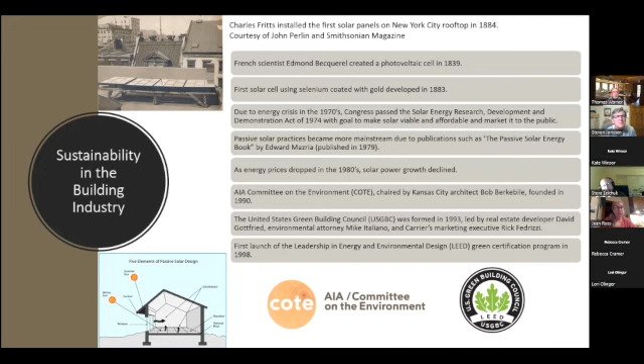And LEED has gone through a number of iterations since 1998. It's now in its fourth version, and they've actually got a version 4 and then a 4.1. The 4.1 version was an enhancement to version 4, which helped establish better criteria for projects to meet certain requirements.

The LEED program is a point-based system, and it's set up in different credit categories. Those categories are integrated process, sustainable sites, location and transportation, water efficiency, energy and atmosphere, materials and resources, and indoor environmental quality. There are some regional priority credits that tie back to the location of the projects. And then there's a category for innovation and design, for projects that are looking to go above and beyond what is normal in sustainability. Those would be the types of credits that would establish that in that area.

As I mentioned, it is a point-based system. It's about 110 points, and it's got 4 different levels. There's a certified level, silver for 50 to 59 points, gold 60 to 79, and then platinum, which is really the top tier, at 80 plus points.

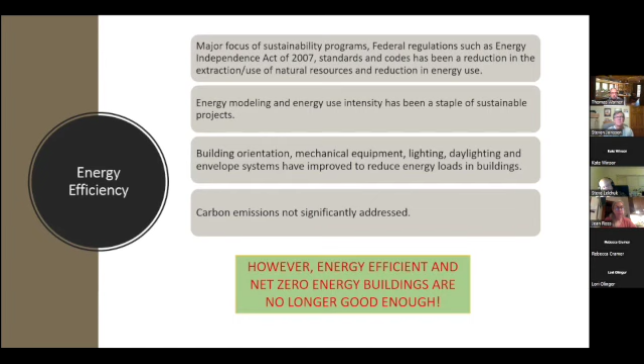So what changed? Well, the climate crisis has really upped the ante a little bit. We've now seen 47 continuous years of increasing global temperatures. Our weather-related events are now becoming more intense. We've got more extreme drought. The wildfires are much greater. We've seen the ferocity of our hurricanes increase due to rising ocean temperatures.

We've seen more 100-year floods than we've ever seen. And when we see the oceans rise, the storm surges are just taking out communities. We've also seen an increase in tornadoes. But a couple of the things that I think are even more significant are the melting of the glaciers and polar ice caps. Those are in turn raising the ocean levels. At this point, they're swallowing low-level islands, but in the future, they might actually affect major communities such as Miami.

One thing I thought I would point out is the photograph in the upper left is from a photo I took in Iceland back in 2017. The sign that's in there is where that glacier was located in 2010. And it had receded by 2017 about 1/4 of a mile, and it continues to recede. So that gives just a sampling of what is happening with our glaciers and polar ice caps.

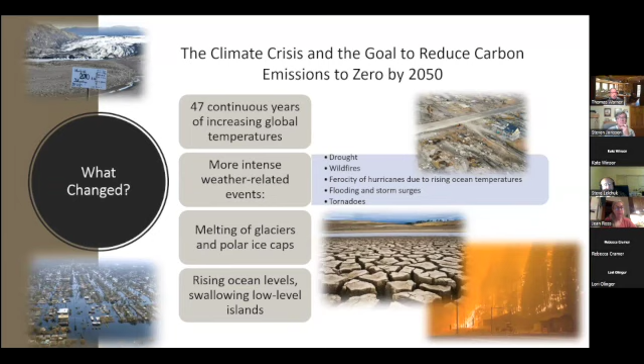Just to reinforce the issue on global warming, this is a 30-second slide presentation of the global temperature anomalies from 1880 to 2021. It's based on a normal temperature cycle from 1951 to 1980. And as you can see up in the upper part of that is the years that we're seeing. And as it gets further towards our current time, you can see how the temperatures have increased significantly.

So when people say that it's always been warm and cold, we've never seen this before. This is so far out of what we've seen in the past as far as temperature anomalies.

Oops. And let me move that forward. All right.

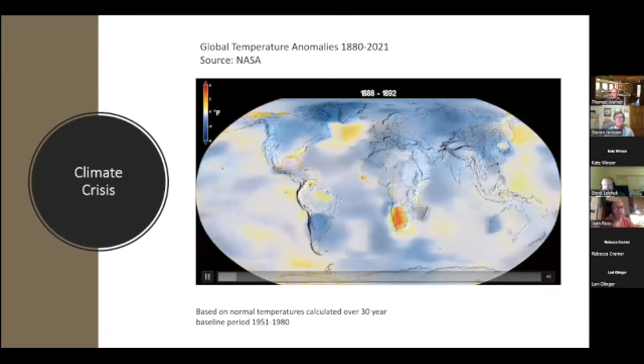And as a result of these increasing temperatures, the United Nations Climate Change Conference of 2015 issued the Paris Agreement, where they set a temperature increase limit of 1.5 degrees Celsius above the pre-industrial levels. And what they're really stating is we need to have rapid and far-reaching improvements to reach net zero greenhouse gas emissions by 2050. That was the goal, is to get net zero by 2050.

And what happens if we exceed that? Well, first of all, down in the graph there, that's showing our current warming rate. And at the rate we're going, we will hit that 1.5 degrees by 2040. So we really need to make significant improvement to avoid that 1.5 degree level. And the right-hand side slide will show what happens if we're hitting that 1.5 degrees.

We're going to see a loss of a lot of species, plant species, insect species, coral reefs. We're going to see a lot of our sea ice disappear in summers, and then we're going to have to deal with a lot more extreme heat conditions as well. And we really don't want to think about what happens if we go beyond 1.5 degrees. When we get to two degrees, it's significantly worse.

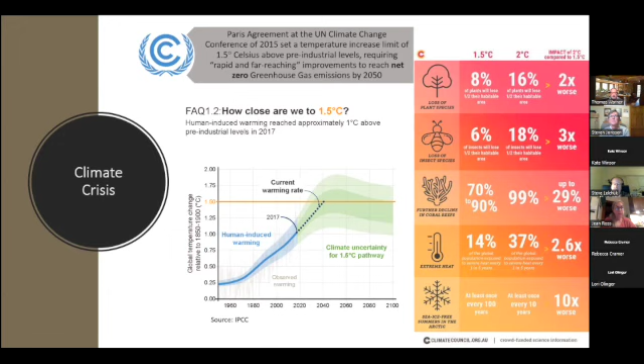One of the other things that's been coming out in the last few years is an increase in the number of corporations that are developing environmental, social, and governance frameworks, and that's including reporting carbon emissions. Corporations are starting to also require that new construction projects achieve net zero carbon.

We're also seeing in the industry, the architect, engineering, and construction firms are now seeing requirements to report our own carbon emissions within our own operations. The Carbon Disclosure Project and EcoVadis are a couple of examples of those carbon reporting frameworks that we would report our own emissions to. Again, it's really the corporations pushing a lot of this now to decrease the carbon emissions on not only their projects, but our side as well.

So how does this all relate to the building industry? Well, the built environment really makes up about 42% of all total global CO2 emissions. About 30% of that is in building operations, and then the remaining percentage of that is from the materials that are put into the building. That's called embodied carbon, and I'll talk about that in just a few minutes here.

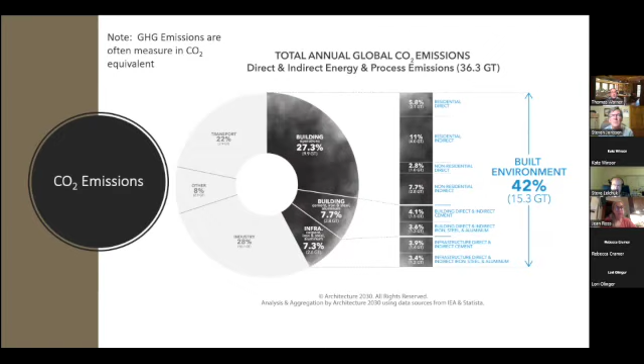So our presentation really concentrates here on decarbonization, and the key principles of building decarbonization include energy efficiency, electrification, grid interactive, and then renewable energy. And grid interactive is basically connecting buildings to the grid through energy management systems. If we've got renewable energy systems, they would be feeding back and forth with the grid. Also things like demand response as well, for peaks and so forth.

We're also looking at ways to reduce the use of fossil fuels, using low carbon fuels. And then again, we talked about in new construction, as part of this decarbonization, we'd also be looking at low embodied carbon.

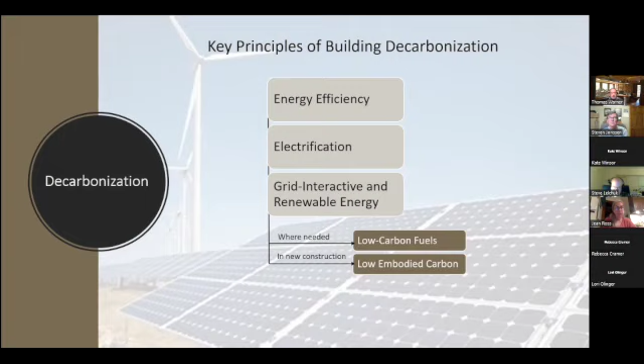So the two types of carbon that we have are operational carbon and embodied carbon. Operational carbon is anything that's related to the energy consumption and operations of the building. Switching on a light will hit operational carbon. If you've got an appliance that you're plugging in, that's going to take operational carbon. Your mechanical systems that are running, that's all operational carbon.

On the other side of it is embodied carbon, and embodied carbon comes from the extraction, manufacture, transportation, and construction, in addition to the end of life of a material. The main difference between operational carbon and embodied carbon is basically a fixed carbon. We typically would have an upfront carbon, and I'll talk about that in a little minute.

But the operational carbon, from a typical building, would be greater than the embodied carbon. But in a high performance building, we're looking at that being significantly less than what we'd be seeing in the embodied carbon, as the embodied carbon is really a fixed quantity in a standard similar type building.

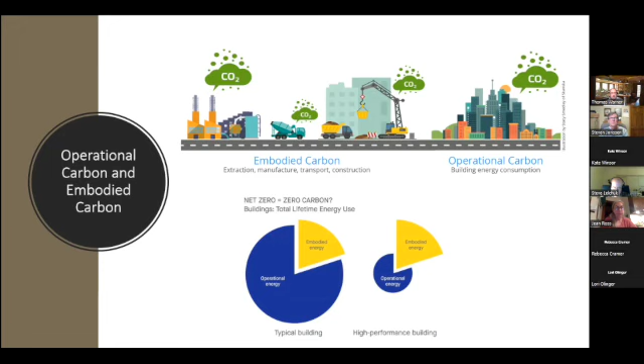So in operational carbon, for decarbonization from the operations side, to meet our goal of zero emissions by 2050, we'd be looking at highly energy efficient buildings, and those would include building envelopes, mechanical systems, LED lighting and commissioning, making sure that all of our systems are operating properly.

Then electrification is another key component of that, and that's no on-site fossil fuels, and that would include things like using electric heat pumps, electric boilers, electric water heaters, and electric appliances. And then additionally, we'd be looking at 100% powered by on and off site renewable energy. That would include building level solar farms, wind power, solar hot water, and there's other solutions there as well.

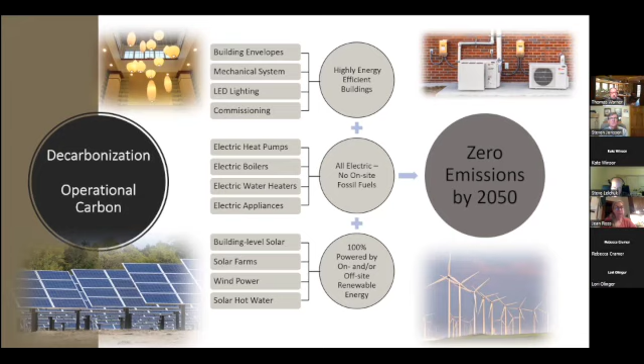So not only do we want to look at it from the building side, but we're looking at it from the grid side. So if we electrify all of our buildings and the grid can't support it, that's not going to work. What we want to make sure is that the grid is also becoming carbon neutral, and the grid actually has become 30% less carbon intensive between 2000 and 2019. We've also seen that 83% of America's new power came from wind and solar in 2021.

There's been at least 18 states, and possibly more since this slide was produced, that contain 45% of Americans and have committed to carbon neutral grids by 2050. And Biden in his Inflation Reduction Act proposed a carbon neutral grid by 2035. So those are goals from the grid side. And if we can get that all to work, that'll go a long way in getting us down to net zero by 2050.

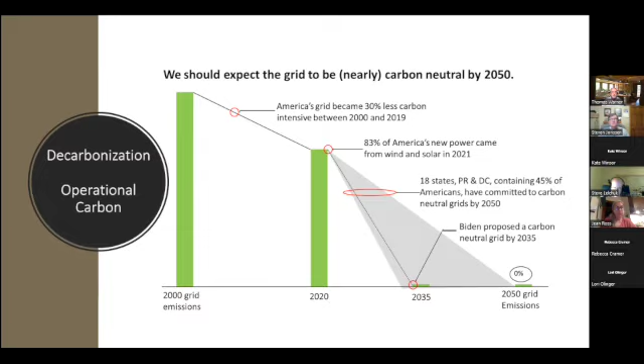So one of the things that has changed is the cost of power for power plants, and solar power has reduced in a little over a decade by over 80% in cost. And onshore wind has also reduced by at least 20%. So now those two are the lowest cost of all the electricity prices for new power plants.

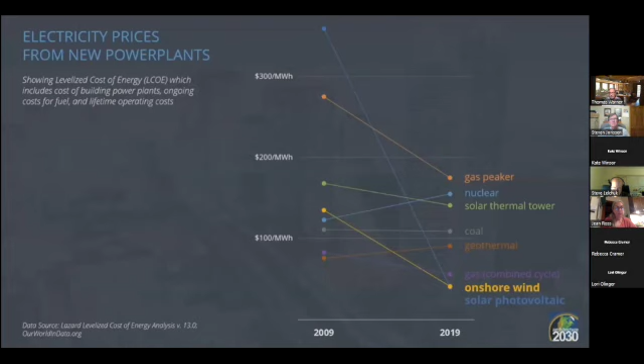And now I'm going to talk a little bit about embodied carbon. Embodied carbon is really the greenhouse gas emissions arising from the manufacture, transportation, installation, maintenance, and disposal of building materials. This slide shows the different stages of embodied carbon, and the numbers down below, the A1s through C4s, are life cycle stages. And I'll talk a little bit more about life cycle in just a minute.

But again, the emissions start generating from the moment that the raw material is extracted from the earth, and it continues through to the end of its life. But like I said, there is upfront carbon, and then if we take it all the way to the end of life, that would be a whole life cycle.

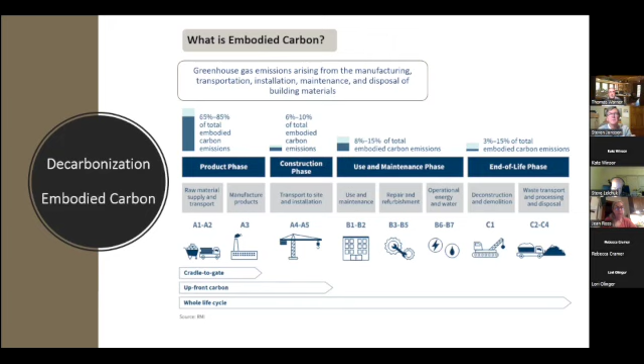So if you've got things that need to be repaired, any materials that are used to repair things, in the case of solar panels, you might have a panel that's gone bad and you have to replace it, so that comes into that use and maintenance phase. So repair and refurbishment. When you combine all those phases together, it doesn't look like the 75% or whatever you said for the next slide. If you go to the next slide. Yep. It was 74% of the total emissions from the construction.

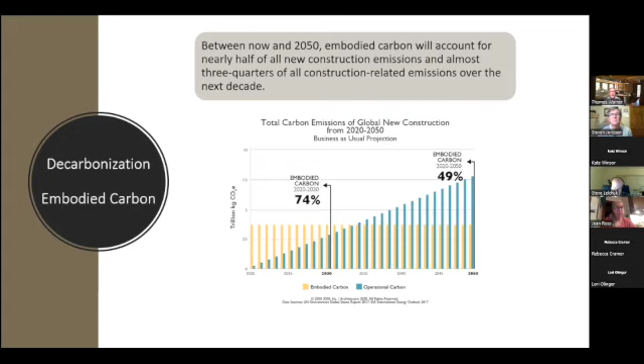Yeah, this is kind of a hard slide; this is looking at business as usual. So in all new construction, embodied carbon makes up 74% of all the carbon in 10 years. Right now it's at 100%. So if you have a building that's built right now, the carbon is going to be at 100%. Okay. As the operations of that building increase, then the embodied carbon percentage decreases. Yeah. This next slide might help you with that, hopefully.

That looks good. So again, this kind of points that out. Here you can see that the upfront embodied carbon is significantly high at the very beginning of the project, and it's a one-time thing. But operational carbon continues through the life of the building. You might have other steps along the way for embodied carbon as you're doing repair and maintenance. But the operational carbon continues through the life of the building.

In this particular slide, we're looking at it as the grid gets greener, our operational carbon decreases. If we stay status quo on the grid, then the operational carbon stays constant across the timeline. But as our grid gets greener, that number should come down.

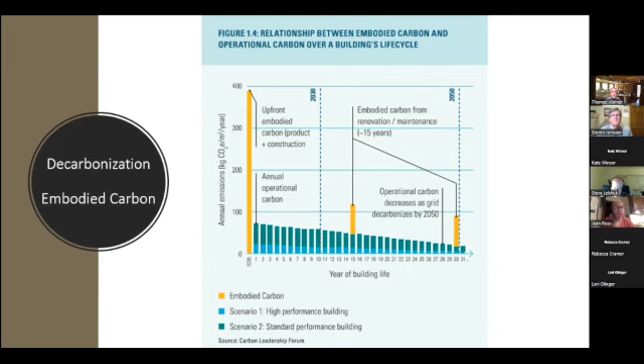So how do we reduce embodied carbon? Well, we want to select low carbon materials. Doing whole building life cycle assessment will help us to understand where we've got our major issues with carbon and find ways to improve in those areas. We can compare similar products' environmental product declarations to determine lower carbon products, and I'll talk a little bit about environmental product declarations in a couple of minutes as well. We can select products with recycled content.

In the case of structural steel, the extraction of the minerals that go into structural steel is significant. So from my perspective, I try to specify as high a recycled content in structural steel as possible. You can look at different manufacturers of steel or different plants, and different plants have different percentages of recycled content. I'd like to see at least 75% recycled content in all structural steel components. The industry average, according to the US GBC and LEED, is 25%. But if we can up that significantly, that reduces your carbon footprint.

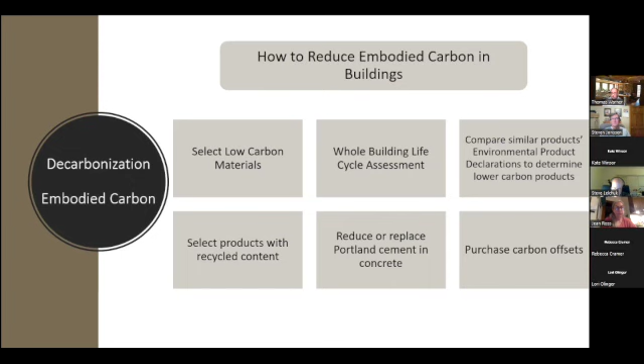Another thing we look at is reducing or replacing Portland cement in concrete. And then the last one is purchase carbon offsets. So when we're selecting low carbon materials, there are certain tools that we can quickly look at and judge which ones are going to be lower in carbon for us. This is just an example of one of those types of tools.

In this case, you'll see that concrete and steel have the highest what they call total global warming potential, which is another name for CO2 emissions. And that's fairly typical that concrete and steel are always going to be at the high end. You'll also notice in this particular slide, talking about glue laminated timber beams and columns and cross laminated timber sheets, that the timber is the lowest of the CO2 emissions for structural frames.

And the term cross laminated timber is a relatively new term for us in the industry. Glue laminated beams, we've all seen those in the past. I don't know if anybody can see me, but glue lams are typically going to be one on top of each other, but a cross laminated is where each layer is perpendicular to the next, and that forms a stronger bond than the glue laminated timber beams.

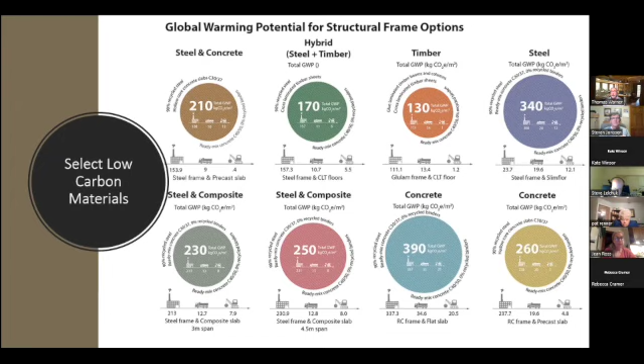Yeah, and like I said, it really is dependent on the systems and how it's designed. In the case of steel, how you design your steel framing system, you can add more columns, you can increase your column spacing and decrease your joist sizes, and all of that will change how much steel you've got going into your project, and that affects cost as well. Okay.

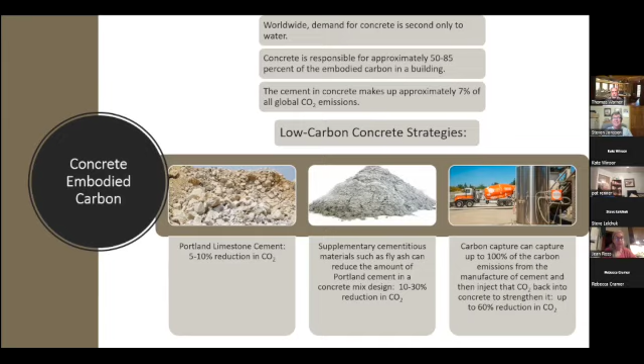All right, Tom, and we are at the 8 o'clock hour, so I'll just go to the next slide, and that should be it. Okay.

Any other further questions? So we did cover all the questions that were in the chat, I believe. Yeah, and I think we answered Diane's question about what else is in the pipeline. We talked about a bunch of different things there. Yeah.